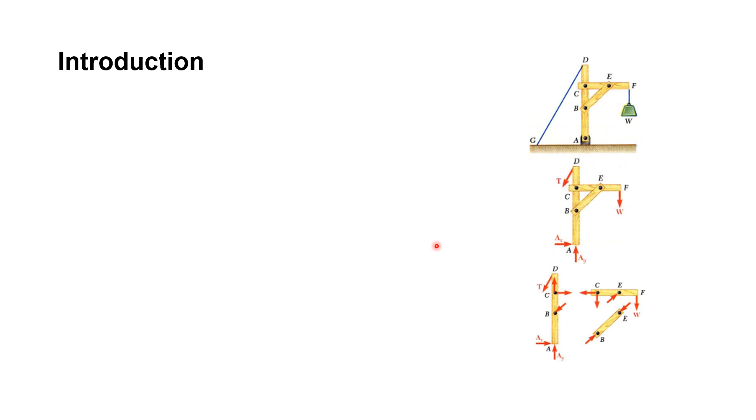Based sa ating reference book, sabi dito, for the equilibrium of structures made of several connected parts, the internal forces as well as the external forces are considered. In the interaction between connected parts, Newton's third law states that the forces of action and reaction between the bodies in contact have the same magnitude, same line of action, and opposite sense.

Halimbawa ito, yung member natin dito. Kung makikita nyo, ito yung point B natin, meron tayong force dito na papunta or moving towards our point B. Pero kapag kinonsider na natin yung member naman natin na BE, makikita nyo, ang naging direction natin is opposite na doon sa nararamdaman ni member DA. Kaya makikita nyo, compressive na yung force natin dito.

Pagdating din sa analysis of structures, kino-consider na natin kung compressive or tensile yung force na nararamdaman ng object natin. Paano ba natin masasabing kapag compressive? Kapag compressive, yung force natin is moving papunta doon sa point of interest natin. At kapag tensile naman, is moving away doon sa point of interest natin.

Mamaya mas maintindihan natin siya pagdating natin doon sa mga other slides natin dito sa presentation.

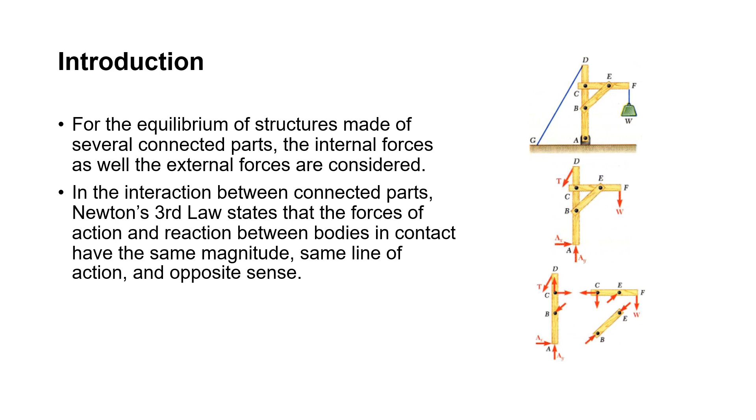Meron po tayong tatlong categories ng engineering structures na i-consider. Una is yung frame, it has at least one multiple force member. Pag trusses naman, from two force member. At lastly is yung machine, structures containing moving parts designed to transmit and modify forces.

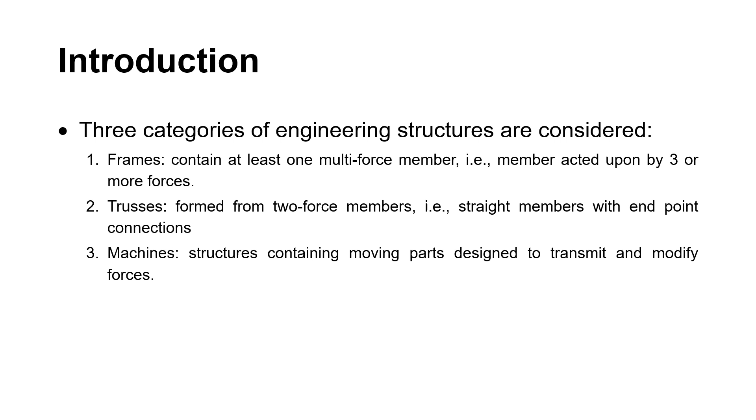Pag-usapan natin si truss muna, kasi ang pag-usapan natin for today is si truss and si frames. Mag-start muna tayo kay truss, define muna natin kung ano si truss.

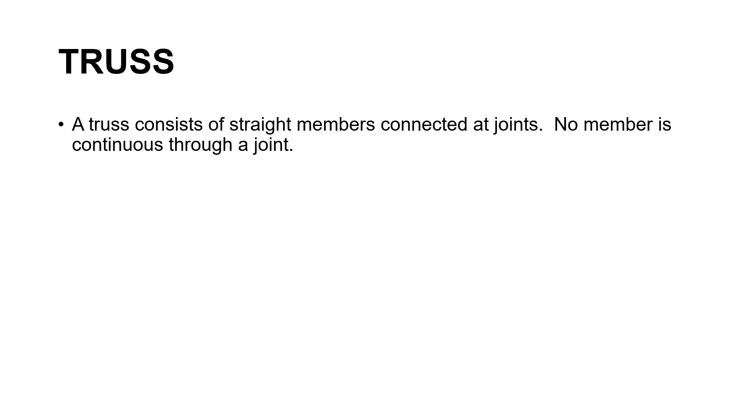A truss consists of straight members connected at joints. No member is continuous through a joint. Bolted or welded connections are assumed to be pinned together. Forces acting at the member ends reduced to a single force and no couple.

Pinaka-common example ng truss natin dito na nakikita natin is dun po sa mga bubong ng bahay natin. Yung pinagkakapitan ng yero, yun po is yung tinatawag natin na trusses. Normally, dati, ang truss ginagamit dyan is wood, yung material natin, pero ngayon nag-move na tayo into metals.

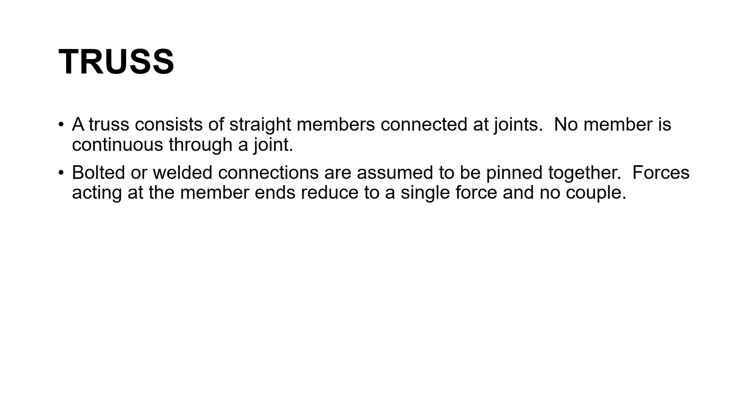Kasi alam naman natin na ang woods is susceptible sa pagkabasa, pagkabulok, then inaanay. Unlike dun sa metals natin, na although may chance sa kalawangin or mag-corrode siya, ang nangyayari lang is nalalagyan naman siya ng protective coating. Pagdating naman sa aircraft, yung mga lumang design ng aircraft natin, tinatawag din natin siyang truss type. Yun naman yung application nito sa atin sa aviation.

Ito po sabi ko kanina, kapag yung forces natin, ang tendency is hinahatak yung member natin palayo doon sa point of interest, yun ay tension. At kapag yung force naman natin, ang tendency is to compress the member, yun naman ang compression.

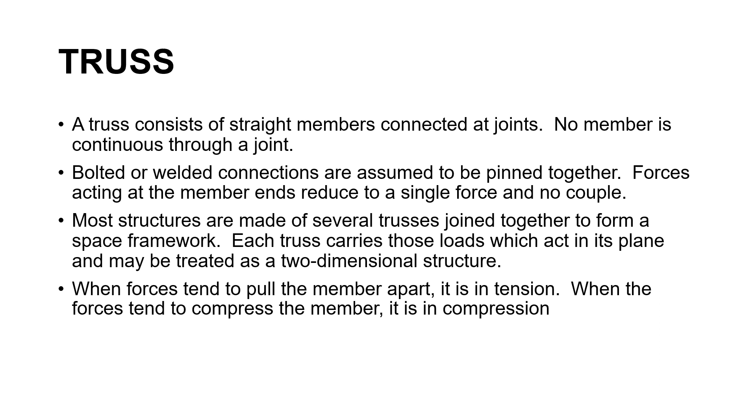Ito po yung mga ilan sa example ng truss type natin. Meron tayong Pratt, meron tayong Howe, Fink, meron tayong Baltimore, K-Truss, Stadium, Cantilever portion, and Bascule.

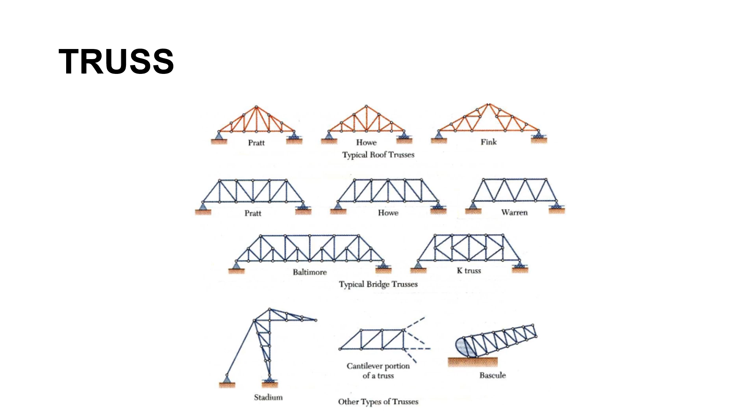Dito, kapag dating sa truss type natin, pag-usapan natin, di ba na matatandaan ninyo doon sa previous topic natin, kinuha lang natin yung resultant, yung reaction, and then tapos na. Ngayon, sa portion natin ngayon, sa topic natin ngayon, iintindihin natin o iisipin natin lahat ng force dito sa bawat member na meron tayo.

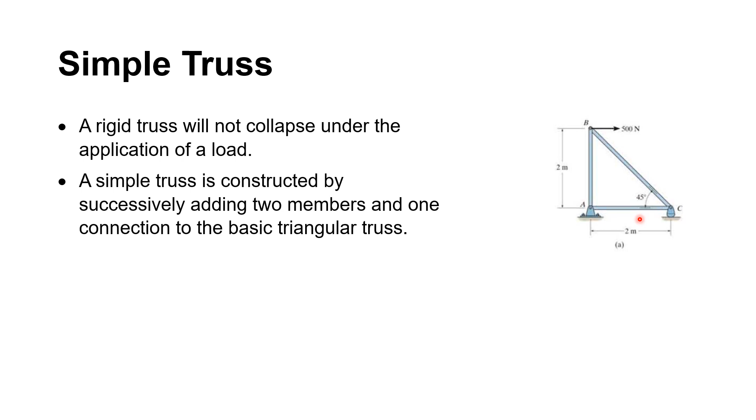Yung member na tinatawag natin dito, halimbawa ito, meron tayong 3 members dito. Ano yun? We have member AB, member AC, and member BC. In a simple truss, M is equals to 2J minus R, where M is the total number of members, J is the number of joints, and R is the number of reactions.

So dito, itong M is equals to 2J minus R, mahalaga na lagi natin itong isipin. Bakit? Kasi yung method na ipapakita ko ngayon ay applicable only for statically determinate trusses. Kapag statically indeterminate na yung truss natin, ibang method na yung gagamitin natin.

Paano natin ma-check kung statically determinate siya? I-apply lang natin itong M is equals to 2J minus R. Kapag nag-equal yung value natin ng M is equals to 2J minus R, ibig sabihin statically determinate.

Kapag sinabi naman natin joints, yun po kung saan yung point na nag-intersect yung mga member natin. So for example dito, ilang joints po ang meron tayo? We have joint A, joint B, and joint C. So meron tayong tatlong joints, at ilan yung reaction forces na meron tayo?

Kung meron tayong roller, isa yung reaction. Meron tayong pin, so dalawa yung reaction, so tatlo. Kapag in-apply natin yung formula, M is equals to 2J minus R, ilang members meron tayo? Di ba meron tayong tatlo, AB, BC, and AC.

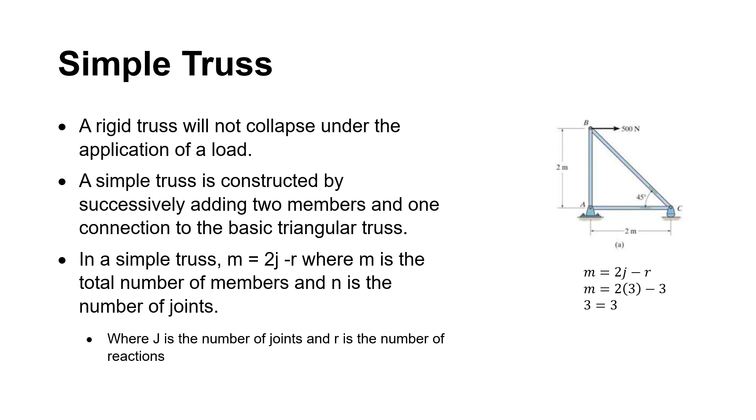So for method of joints, meron tayong dalawang i-introduce dito for analysis of structure: method of joints and method of section. Regardless, may kanya-kanyang pros and cons naman yung bawat method natin.

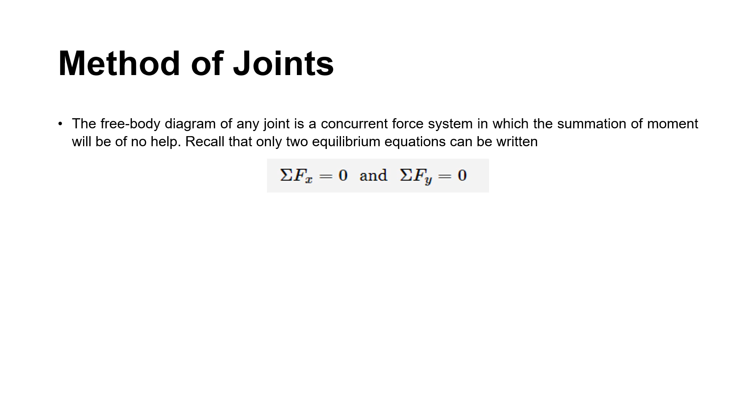Ang pros ng method of joints is kapag pinapahanap sa atin yung lahat ng internal forces nung bawat member ng truss natin, kasi dito, lahat madadaanan po natin. Mga principle lang naman na gagamitin natin dito is yung summation of forces lang natin - summation of forces X, summation of forces Y, yun po yung mga equilibrium equation natin.

Kailangan din po natin dito yung free body diagram natin. Kasi nga, for example, mali yung negative yung force na nakuha natin, ang ibig sabihin lang nun is mali yung assumption natin ng direction ng ating forces. At kailangan nating i-indicate if yung forces natin is under tensile or compressive force siya.

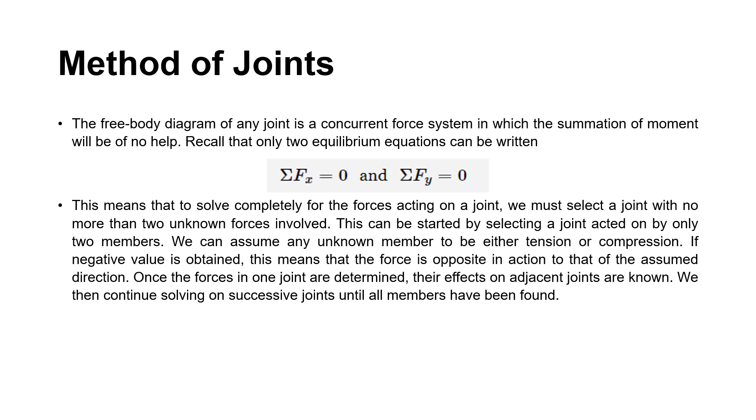Ano po ba yung procedure natin for analyzing a truss using method of joints? Una, free body diagram. Identify po natin kung ano yung mga reactions na meron doon sa forces natin. Then, mag-orient tayo ng X and Y axis natin and be sure lang na tama yung pag-orient po natin.

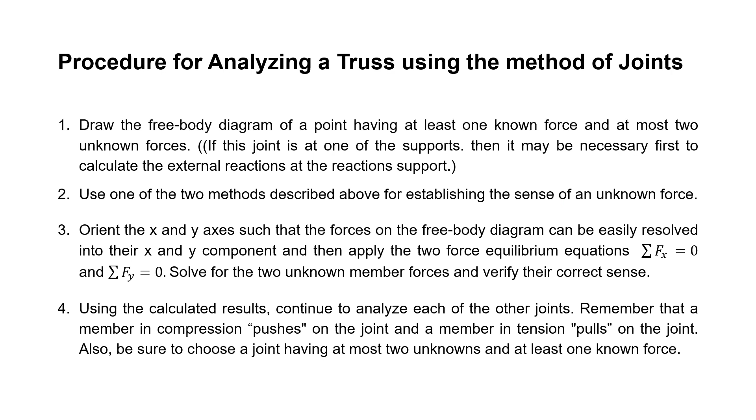Then using yung mga results natin, we can analyze na yung mga joints natin. Remember na kapag in compression, yung mga force po natin is moving towards our joints, at kapag in tension naman, is moving away sa our joints.

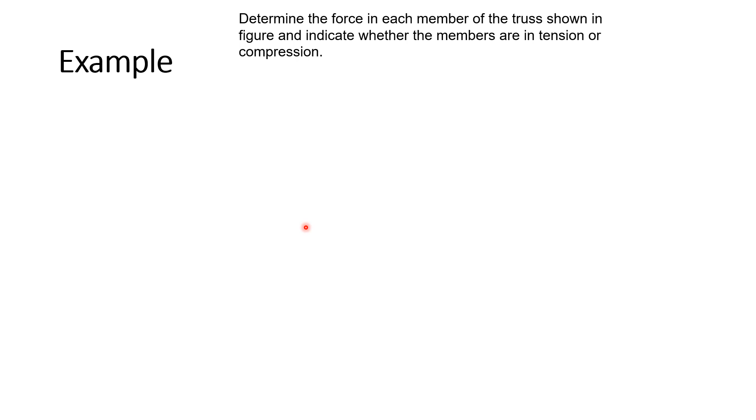Para po mas maintindihan natin yung concept ni method of joints, apply po natin sa example. Determine the force in each member of the truss shown in the figure and indicate whether members are in tension or compression. Ngayon, pipili tayo, pwede natin kunin muna yung reaction forces.

Pero I think, since kulang yung given natin, pwede naman tayo mag-involve muna or gumamit na ibang step. For example, pwede tayo magsimula agad doon sa joint B natin. So, drawing natin yung free body ni joint B, then ito po yung magiging free body diagram natin.

Paano po, sir, paano naging 45 degrees yun dito, yung angle natin dito? Alam natin, di ba, na ang triangle natin ay 180 degrees. So alam natin kung ito ay 45 degrees, ito ay 90, ilan ang kulang para maging 180 degrees? Meron pa tayong 45 degrees natin.

Ito po, ito yung sinasabi ko sa inyo noong previous topics natin, paano tayo mag-a-assume ng direction. For example, ito yung 500 natin, meron tayong 500 newtons na going right. So to counteract that, yung force natin, para masabi natin equilibrium, dapat meron tayong force na nagtutulak papunta sa left side. Kaya si FBC natin is going to the left. And then FBA natin, kung meron tayong force na going up, so dapat may force tayo na going down.

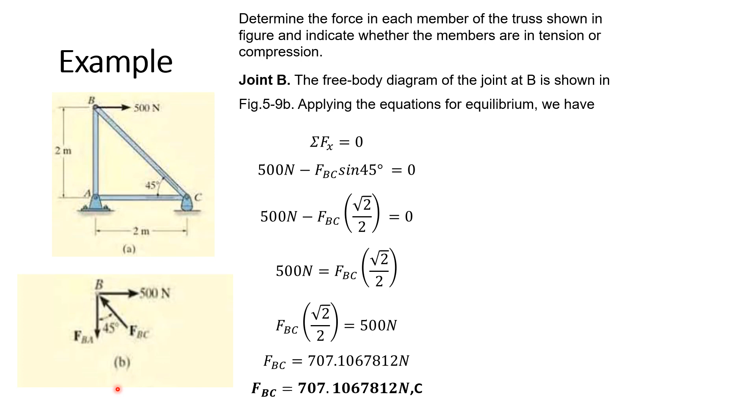Paki-store po yung value na yan, para gagamitin natin siya sa susunod na pag-solve natin. Then indicate natin kung tension or compression. Makikita nyo po, yung FBC natin, ang direction ng arrow natin is papunta doon sa joint natin. Therefore ito ay in compression.

Then next is summation of forces along y naman tayo. Ang may y component lang dyan is si FBC and si FAB. So kung ang ginamit natin sa x component is sine function, ang gagamitin naman natin ay cosine function, kasi alam naman natin nagpapalit lang yung dalawa na yan. So we have FBC cosine 45 minus FBA.

So we have 707.1067812 times square root of 2 over 2 minus FBA. Lipat natin, kapag sinimplify natin to o sinolve natin, we have 500 Newton minus FBA is equal to 0. Therefore FBA natin is 500 Newton.

Then again, kailangan nating indicate kung tension or compression. Ano ba ang direction ni FBA? Moving away doon sa joint natin. So therefore FBA is in tension.

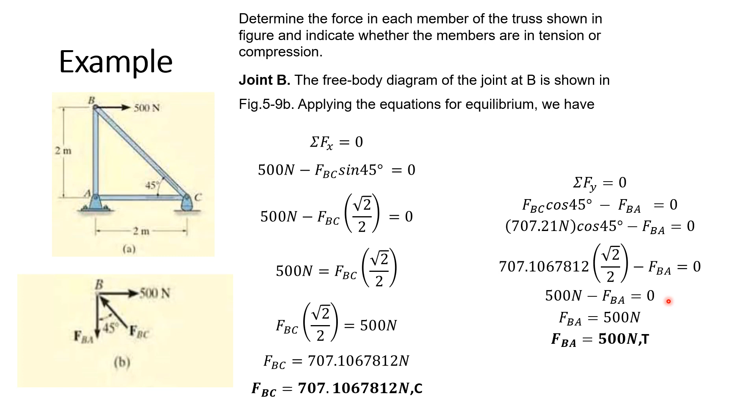Tapos na po tayo doon sa joint B. Proceed naman tayo sa ibang joint. Ngayon doon tayo kay joint C. So drawing natin si joint C natin. So we have...

707.1, ito po dito sa diagram natin naka-rounded off siya, pero ito ay naka-stored value. Sabi po kanina, kapag i-drawing natin siya dun sa ibang member naman, kung in tension o in compression, yung force natin kanina, dapat ang direction niya dito pagdating sa ano natin is in compression pa din siya. So paano siya magiging in compression? Dapat moving towards the joint siya. Kaya makikita nyo dito, si FBC natin is papunta kay joint C.

Then kapag dating sa free body diagram, sabi nga natin kung ito ay going down, dapat meron tayong force na magre-react sa kanya o sa opposite direction. Kung going down, therefore ito yung sa reaction natin kay member C o kay support C is going up. And then ito ay going down na going right. So to resist, si FCA naman dapat is going to the left side or to the negative x direction.

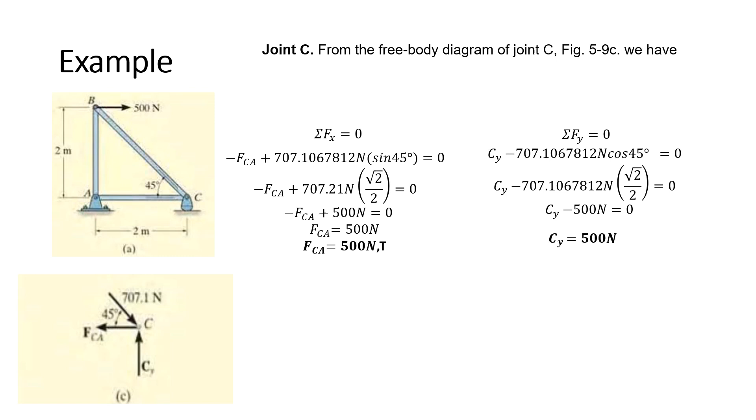The next step is summation of forces along y is equal to 0. Kung sine 45 ulit yung ginamit natin kanina, so therefore ang naman natin dito is cosine 45. So Cy minus 707 cosine 45, Cy minus 707 times square root of 2 over 2. Cy minus 500 Newton is equal to 0. Cy is equal to 500 Newton.

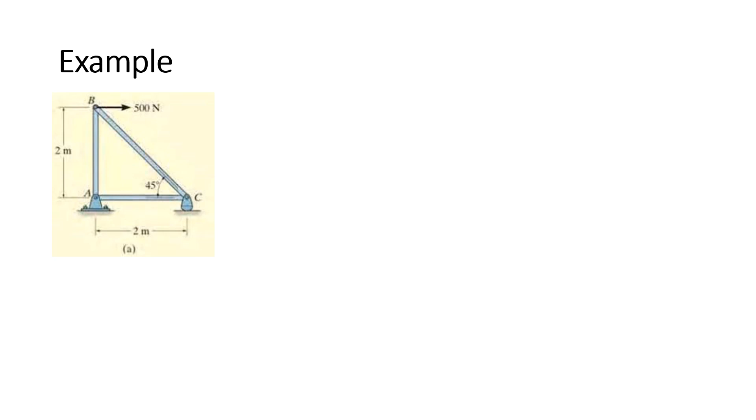Then next, si Cy, alam natin na siya ay yung ating reaction forces. Kaya hindi natin siya kailangan i-indicate kung tensile or compressive siya. Pero kung i-indicate mo, since moving towards doon sa joint natin, siya po ay compressive. Pero since reaction forces siya, we leave it as is, wala pong tensile or compressive.

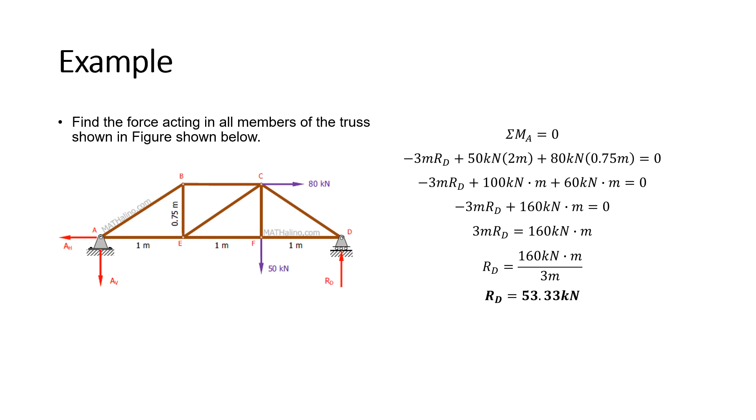Paki-store po yung value natin dyan. Then proceed tayo ngayon sa bawat force member natin.

So at joint A, ito yung magiging free body diagram natin. Ang given sa atin dito ay yung slope ng line natin. Pwede naman tayo, kung hindi angle yung given, we can use the slope of our line. So ito yung free body diagram ni joint A.

Ngayon, kung meron tayong negative force na going to the left, which is yung AH natin, dapat meron tayong force na nagka-counteract sa kanya na going to the right, yun si FAE. Then FAB natin, kailangan i-counteract niya yung force down natin, so dapat siya ay going up. Ngayon, na-drawing natin yung free body diagram.

Pwede na tayo ulit mag-summation of forces. Summation of forces vertical equals to 0. Ang may vertical component lang dito is si FAB at vertical reaction natin kay A. Ano ba yung sine function natin dyan?

Opposite over hypotenuse. Ano ba yung opposite dito? Opposite side natin is 3, hypotenuse natin is 5. So 3 over 5 FAB is equal to 3.33 kN, yung vertical reaction natin dito.

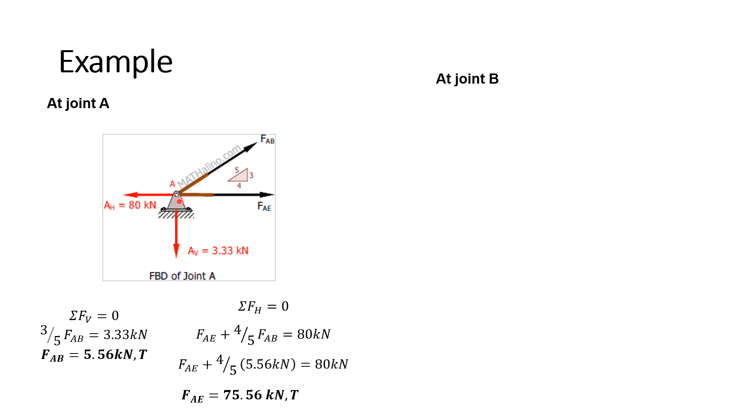Then proceed tayo kay joint B. Dito alam natin, nandito si joint B. Ano mapapansin nyo pagdating sa free body diagram natin? Kung kanina, in tension siya dito, dapat pagdating dito, tension pa rin siya. Kung dito, moving away siya kay joint A, dito, moving away siya kay joint B.

Then kapag meron tayong force na going down and going to the left, dapat may force tayo na going right and going up. Ito po yun, kaya yung pag-assume natin dito, FBC is going to right and FBE is going up. Ano yung next step na gagawin natin? Again, paulit-ulit lang tayo dito, equation of equilibrium.

Summation of forces horizontal is equal to 0. Ang may horizontal component lang dyan is si FAB and FBC. So ano po natin, no? FBC. Negative FAB plus FBC is equal to 0.

Yung x-component ng FBC natin, ng FAB natin. Kaya lang ang hinahanap natin is si FBC, so ilipat lang natin sa kabilang side si FAB. Kaya po nangyari dito is naging positive na si FAB natin. So FBC is equal to 4 over 5 FAB.

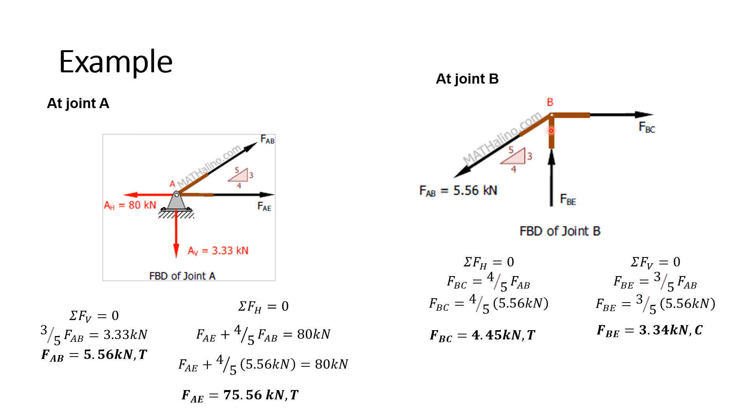So FBE is equal to 3 over 5 times 5.56 kilonewton, FBE is equal to 3.34 kilonewton. Paano siya naging compression? Compression siya kasi ito ay papunta doon sa joint B natin.

Next is proceed tayo kay joint E. Dating kay joint E, ito naman yung magiging free body diagram natin.

Ito ay FBE, so FBE is equal to 3.34 kilonewton. FAE, ito ay opposite direction lang noon sa kanina, yung force natin going right. So kung in tension siya, dapat in tension pa din siya dito. Ito is kung in compression, so dapat yung FBE natin is in compression pa din. Kaya ito ay papunta dito sa baba. Ngayon kung meron tayong force na going to the right o going to the left, dapat may counteraction ang isang member natin. Kaya nagkaroon tayo dito, ang assumption natin ay going to the right. At dito naman kung merong going down, dapat meron tayong going up, which is si FCE.

Ulit lang po tayo, repetitive step na lang tayo dito: summation of forces horizontal and summation of forces vertical. So summation of forces vertical is equal to 0. We have 3 over 5 FCE is equal to FBE. Bakit 3 over 5 FCE natin? Kasi po ito ay yung ating sine component o y component natin. Then 3 over 5 FCE is equal to 3.34 kilonewton. Divide both sides by 3 over 5, wherein kapag nag-divide tayo ng fraction magiging reciprocal ito and magiging multiplication po. Moving away siya doon sa joint natin, so alam natin na ito ay in tension. Solving for FCE, FCE is equal to 5.57 kilonewton in tension.

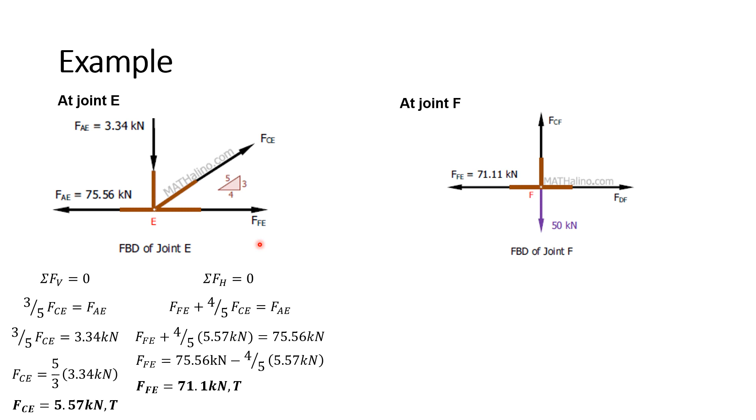Then at joint F, ito yung free body diagram natin. So FFE, kanina alam natin na siya ay in tension, so dapat in tension pa rin siya dito, yung ano natin dito is going to the left. Then si FDF natin, kung going to the left, dapat going to the right. Kung meron tayong force na 50 kilonewtons dito at force F going down, si FCF pwede po natin i-assume na going up. Then summation of forces vertical equals to 0. Wala naman tayong component method dito, bakit? Nasa x and y axis lang mismo yung forces natin. So FCF is equal to 50 kilonewtons. Siya ay in tension gawa ng moving away doon sa joint natin.

Then for FDF, ganoon naman ulit tayo. Summation of forces horizontal equals to 0. So FDF minus FFE is equal to 0. FDF is equal to 71.1 kilonewton in tension. Again, in tension kasi moving away doon sa joint natin.

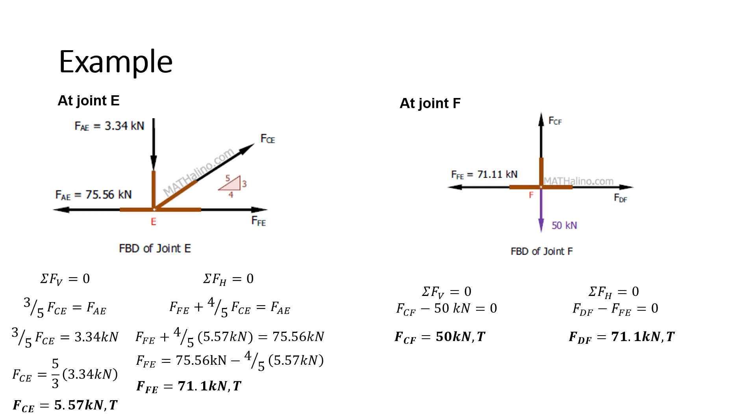Then next step po natin ay summation of forces horizontal is equal to 0. Ano-ano yung may mga horizontal component dyan? Si BC, si CE, tsaka si CD. So substitute lang natin, kung going to the left.

So, alam natin negative 4 over 5 FCD. Kinuha lang po natin yung x component ni FCD, minus 4 over 5 FCE kasi yung x component ni FCE, minus FBC (si FBC is going to the left), plus 80 kN is equals to 0.

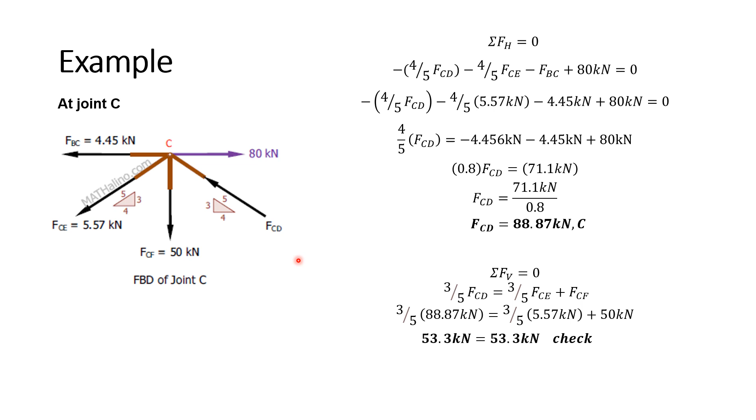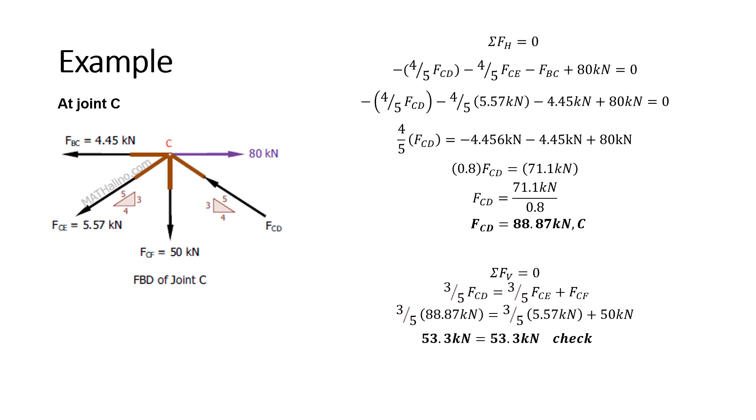Dito po, wala naman na tayo kailangang hanapin kasi nakuha na natin si FCD, kaya lang kailangan nating i-check. Itong checking part naman is hindi siya necessary, pero maganda siyang practice, kasi kapag hindi siya nag-equal dito, therefore may mali tayong mga na-solve na value. Kung makikita nyo po dito, si FCD is nag-equal siya doon sa sum nung CE and CF component natin. Kung nag-equal sila, therefore tama po yung na-solve natin na value. Pero pagdating sa mga assessments, si checking naman po is hindi na siya necessary part ng solution natin, pero wala namang masama kung we can practice na i-verify kung tama yung mga sagot natin.

Then at joint D, si joint D kasi is na-solve na natin siya. Si FCD, na-solve na rin natin, and si FDF. Pero pwede natin siyang i-check kung tama yung nakuha nating value. Checking po is an optional part of your solution.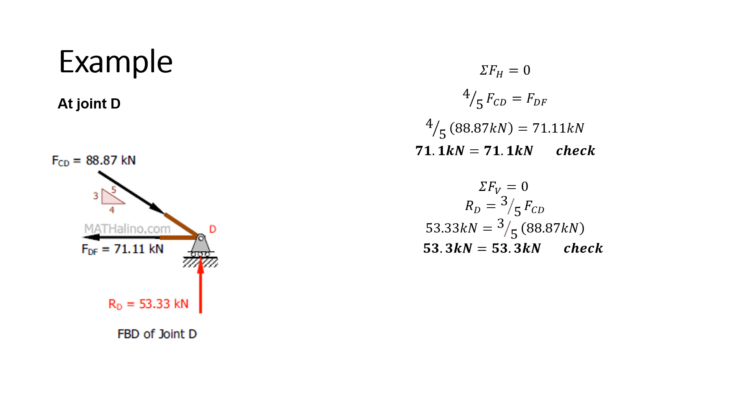Since nag-equal po yung sagot natin, therefore tama yung mga initial value natin. Kasi ang maiwasan naman natin kapag nag-checking tayo, kapag hindi nagtugma yung mga sagot natin, hindi nag-equate sa isa't isa, ibig sabihin meron po tayong mali doon sa solution natin. Ang mangyayari naman doon is pwede natin siyang hanapin para ma-verify natin o ma-check natin kung saan tayong part nagkaroon ng error. Ganun din po kapag nag-summation forces vertical tayo, nag-equate o nag-equal yung sagot natin, therefore tama po yung mga values na na-solve natin.

So, to give the summary, i-drawing lang natin yung free body diagram, then ilagay natin yung mga forces na na-solve natin with their corresponding direction, kung tensile or if compressive.

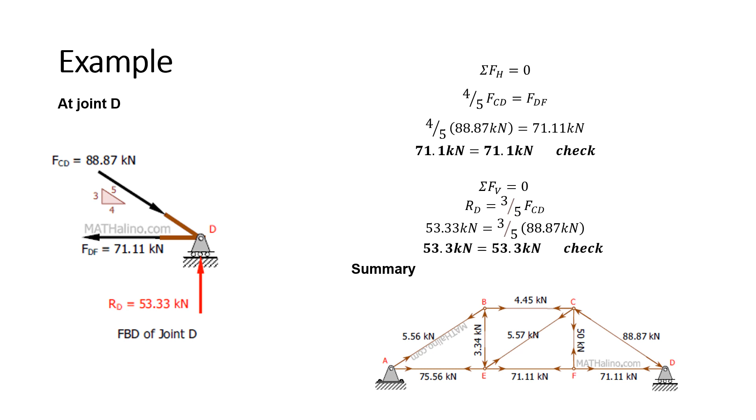Ngayon, introduce ko kayo sa second step, second na type ng solution natin. Ano naman to? Method of sections. Ang magagamit nyo siya, yung pros nga, is pwede nyo siya magamit doon kapag may pinapahanap lang na forces sa specific members, hindi sa lahat ng forces nung lahat ng member ng trusses natin. Pero itong method of section is medyo nakakalito siya as compared doon sa direct type of solution na ginagamit natin kay method of joints, kasi dito mag-apply na rin tayo ng moment, tsaka medyo complicated na yung iba doon sa magiging solution natin. Kasi tayo magde-determine kung saan tayo mag-moment, kung saan tayo magsi-section.

In this method, we will cut the trusses into two sections by passing a cutting plane through the members whose internal force we wish to determine. This method permits us to solve directly any member by analyzing the left or the right section of the cutting plane. Kung sa method of joints ang ginagamit natin ay summation of forces horizontal and summation of forces vertical, dito gagamit na tayo ng pangatlong equation of equilibrium, which is the summation of moment.

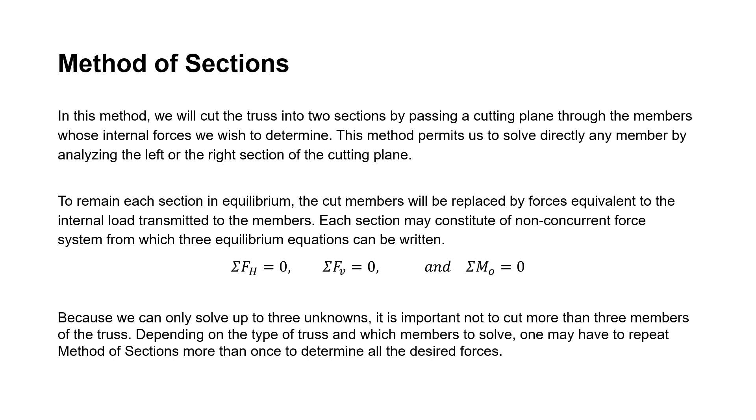Procedure for analyzing a truss using the methods of section. So, no free body diagram, kailangan i-drawing, then kailangan natin mag-decide kung paano natin hahatiin yung trusses natin. So syempre dapat kapag hindi tayo basta-basta magsi-section, kailangan kapag nag-section tayo, nandun yung mga force na pinapahanap sa atin.

Then before isolating the appropriate section, it may first be necessary to determine the truss support reaction. Kailangan pa rin yung reaction forces is ma-solve natin or ma-identify na natin kung ano yung value. Then, draw the free body diagram of that segment of the section truss, which has the least number of force acting on it. Use one of the two methods described above for establishing the sense of unknown member.

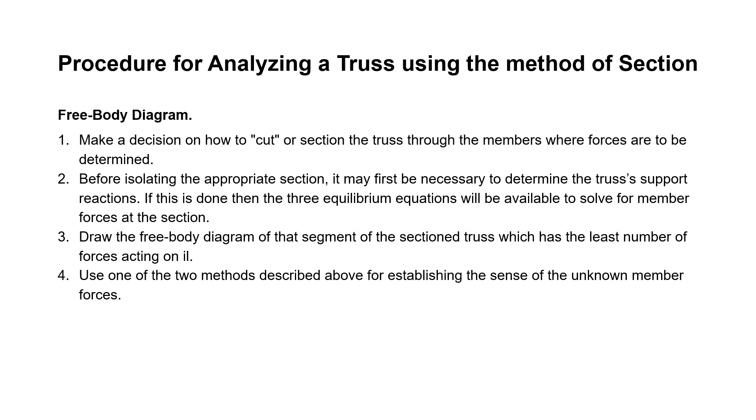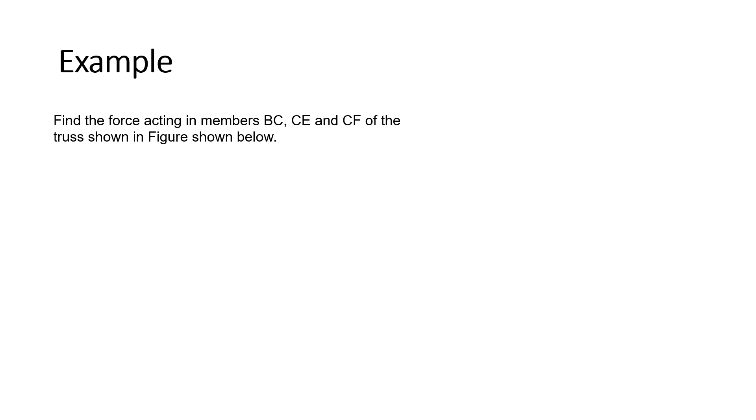Para po mas maintindihan natin si method of sections, apply natin siya dun sa example. Find the force acting in members BC, CE, and CF of the truss shown in the figure below. Ito po, yung truss natin dito is parehas pa rin dun sa truss dun sa previous example natin. Dito papakita lang natin, ang kaibahan lang no, is may specified member lang na pinapahanap, Member BC, CE, and EF.

Again, unang gagawin natin is i-section natin. Nasan ba yung mga pinapahanap? Kailangan kapag nag-section tayo, nandoon syempre yung mga point of interest na pinapahanap sa atin. For example, ito, nag-section tayo at A, between dito no BC. Kapag hinati natin siya, nandito ba yung mga unknowns natin na hinahanap? Yes, nandito siya. We have BC, EC, and EF. Dapat daw na kapag nag-section tayo, hindi lagpas sa 3 yung unknowns na hinahanap natin. Ano lang ba yung mga unknowns doon? Di ba 3 lang sakto, so equal to 3. Ibig sabihin, pwede tayo mag-proceed kay methods of section.

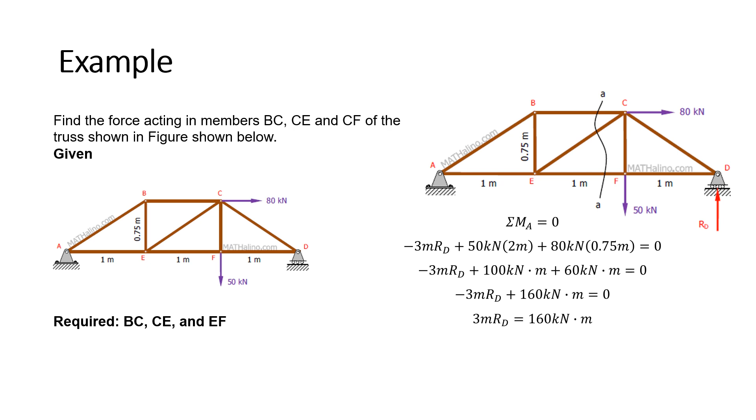Then, syempre, hanapin muna natin yung reaction forces natin. Bakit? Kasi kulang tayo ng force dito, involved sa atin si force D. So, pag nag-section tayo, hanapin muna natin yung reaction. Diba? Kanina, nasolve naman na natin yung reaction, so repeat lang natin yung step. Yung reaction natin dito is 53.33 kilonewton.

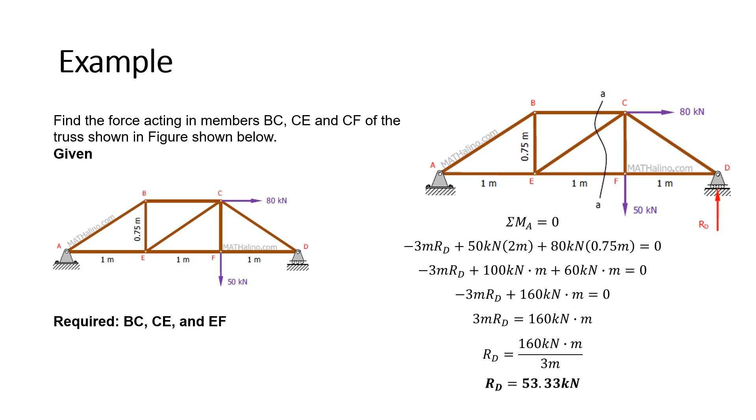Dito, napipili kasi kayo kung saan nyo yung gusto nyong gamitin na section. Dito, ang pinili ko syempre is, ito na, yung right side. Bakit? Kasi may mga given na force tayo dito. Unlike kung dito tayo, kung walang given na force, is mas mahihirapan po tayo.

Then, next is, okay, so ngayon po, na-section na natin siya, hanap na natin yung reaction forces, pwede na tayong mag-moment. Saan po tayo mag-moment? Doon tayo mag-moment kung saan, again, marami tayong force na makakancel. Kapag dito ba ako nag-moment, dito ako nag-moment, sabihin natin, kay point E. Ano yung mga force na maka-cancel sa akin? Ang maka-cancel sa akin dito is ito, yung CE natin, tsaka FE. Then, makukuha ko si BC.

Kaya dito ako mag-moment. So, kapag nag-moment tayo, magiging ganito yung free body diagram natin. Drawing lang natin. Ito yung point E natin. Ganito po kasi yung itsura niyan, technically, nagputol tayo. Then, hindi na natin i-consider yung ibang portion natin. Dito, ito yung isang member na hinahanap sa atin, BC, ito si EF, ito si EC.

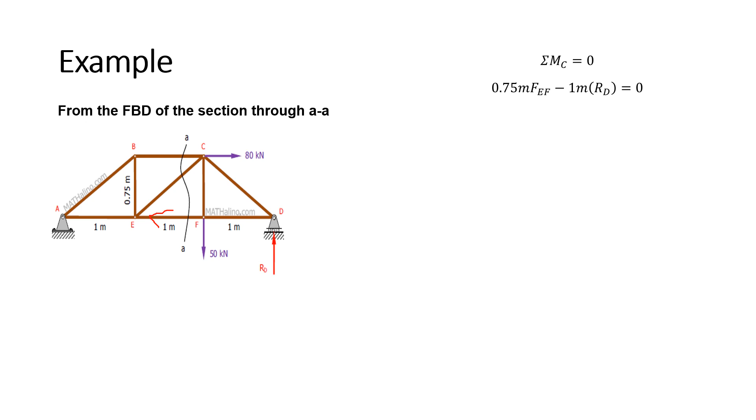So we have, pag nag-moment tayo dito, so again, assumption natin kanina, doon sa direction ni EF is going to the right, going to the left siya. So kapag nag-rotate tayo dito, same rotation, so alam natin na siya ay positive. So negative, perpendicular o moment arm natin, or perpendicular distance is 0.75 times EF minus 1 RD. Kasi bakit negative? Nag-rotate tayo dito, same direction, negative.

Sir, saan napunta si 50 kilonewtons tsaka si 80? Di ba same line of action sila doon sa joint C natin? Dumadaan sila sa joint C, so cancel out po sila. Then transpose natin, sa kabilang side yung RD natin. So 0.75 EF is equals to 53.33 times 1 meter. Divide both sides by 0.75 meter. FEF natin is...

71.11 kilonewton in tension. So kanina hindi ko po pala na-specify doon sa FBD natin. Yung assumption kasi natin kanina ng direction, lahat ay palayo doon sa joint natin. So kung palayo sa joint, kung palayo siya doon sa joint C natin, siya ay in tension. Then ano yung next na hanapin natin?

Pwede tayo ngayon mag-summation of forces vertical kay joint C. Bakit? Kasi ang present na lang na force natin doon is meron tayong FCE natin, meron tayong 50 kN, tsaka yung RD natin. Sir, bakit hindi na natin sinama si CD? Eh di ba meron pa siyang vertical forces dyan?

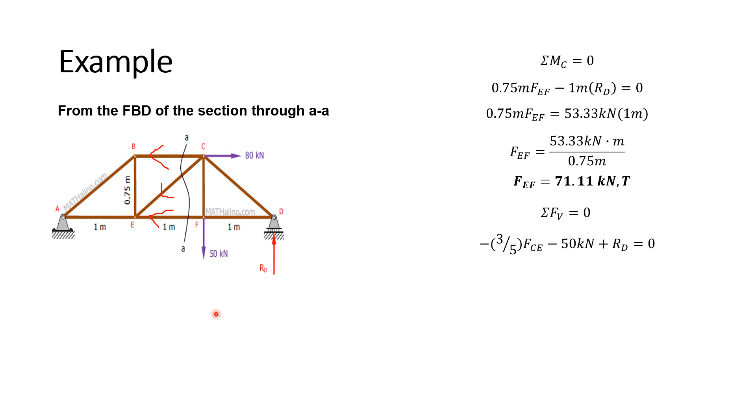So we have... sir, saan nanggaling si 3/5? Doon pa rin siya nanggaling dito sa ratio nung triangle natin dito, yung sa slope natin. Hindi lang siya naka-indicate dito, nalimutan sa presentation, pero doon pa rin po siya nanggaling. So we have negative 3/5 FCE minus 50 plus RD is equal to 0. Negative 3/5 FCE minus 50 kilonewton plus 53.33. So 0.6 FCE is equals to 3.33.

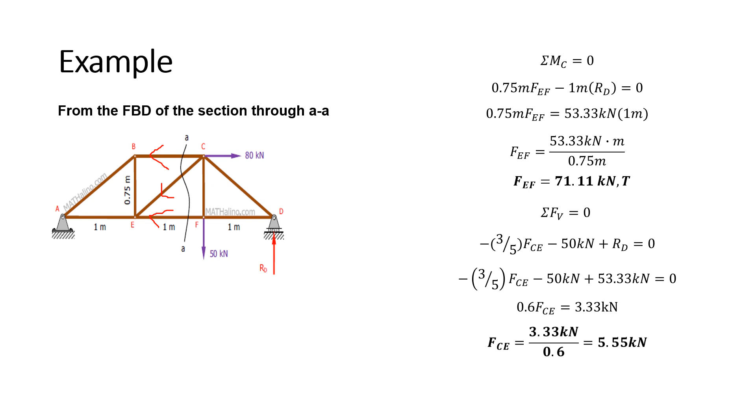Divide both sides by 0.6. So FCE is equal to 5.55 kilonewton. Kaya lang, FCE natin is alam natin na going away doon sa joints natin, so ito ay in tension.

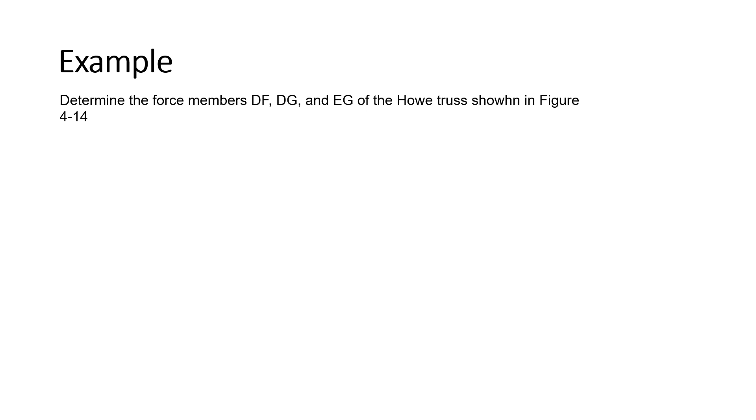Proceed tayo sa another sample problem natin para mas ma-appreciate natin si method of section. So given tayo ng truss dito, pinapahanap sa atin is si member DF, DG, and EG. Wherein dito sa problem natin, si reaction forces ay ibinigay na yung value natin, or yung value ng reaction forces natin, so mapapadali yung pagdating sa solution natin.

So si DF, DG, and EG, hanapin muna natin siya. Saan siya nagfo-fall? Ito po, di ba? Si DF, andito si DG, andito si EG. So pwede akong mag-section dito, pwede akong mag-section dito sa side na to. Regardless, dapat parehas yung value natin kung saan tayo mag-section.

Then ang ginawa po, nag-section tayo dito, then ang kinonsider natin na side is ito, yung right side natin. Dito po tayo nag-section. Then kinonsider natin yung right side. Then nag-assume tayo ng direction ng mga forces natin. So dito, makikita nyo, pinili natin yung section to the right. In-assume na direction ng force natin is going to joint F, moving to joint G, then moving away kay joint G naman yung EG natin.

Given tayo dito ng side natin na 4 meters. So paano naging 4? We have 4 panels at 4 meters: 1, 2, 3, 4. So 16 divided by 4 segments equals to 4 meters, kasi given sa atin, di ba, 16 meters. Kaya yan naging 4. Given tayo dito ng height natin na 3 meters. So doon natin nakuha yung elements nito nung sa slope natin. So kung meron tayong height na 3, meron tayong adjacent side na 4 to solve yung hypotenuse natin, using Pythagorean theorem, we can solve na ito ay 5. So doon po nanggaling yan.

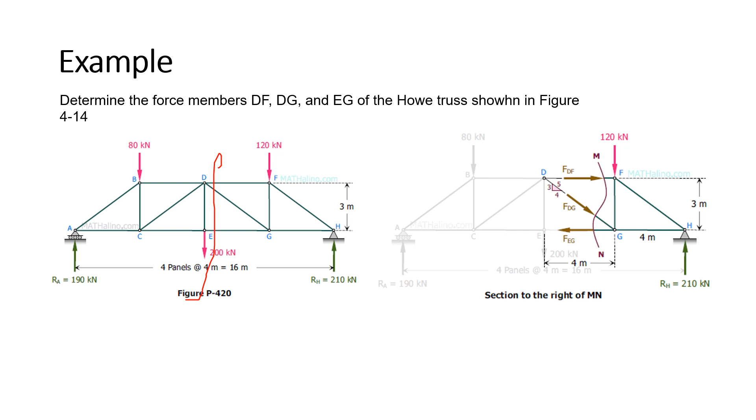Ngayon, pwede natin i-apply yung method of section. So, ito yung free body diagram natin. Summation of forces, vertical muna tayo. Bakit tayo magsa-summation of forces vertical? Kasi doon makukuha natin yung vertical component ni FDG. Kasi ang given lang sa atin dito, horizontal naman si FDF, si FEG, then known value si yung horizontal reaction, vertical reaction natin kay H.

Bakit negative yung FDG? Vertical, negative siya kasi pababa. So, minus 120 plus 210 equals to 0.

Kunin natin yung vertical component. Ano ba ang vertical component natin? Diba, sine function, sine is equals to opposite over hypotenuse. Opposite side natin is 3, hypotenuse is 5, doon nanggaling si 3/5. Then simplify natin ng 120 minus plus 210, we have 90 kilonewton. Then lipat natin.

So, we have negative 3/5 FDG plus 90 is equal to 0. Lipat natin sa kabilang side si FDG. So, we have 3/5 FDG is equal to 90 kilonewton. Divide both sides by 3/5.

Dito, ginawa, pinakita pa yung detailed solution. Multiply muna both sides by 5 to cancel yung denominator natin dito, then mag-divide over 3. So, 3 FDG is equals to 450. FDG is equals to 150 kilonewton.

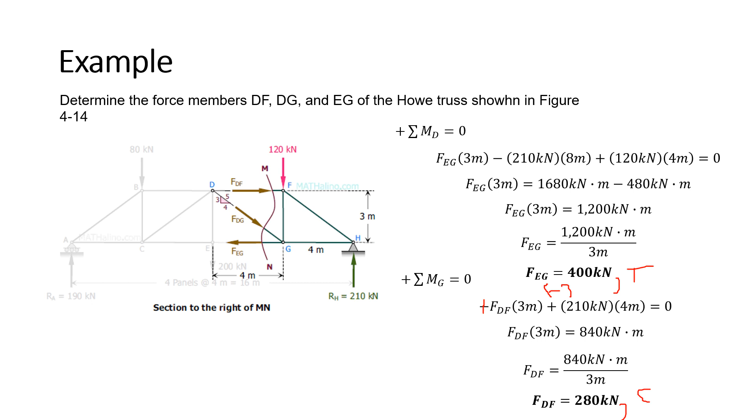Yun po yung ating method of section. Ngayon, pupunta tayo dito sa last natin, which is yung frame analysis or method of members.

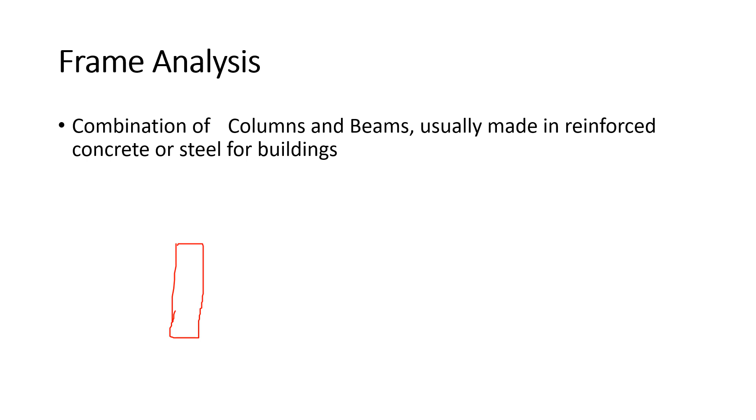Si frames naman po is combination lang siya ng columns and beams natin. Normally, made ng reinforced concrete kapag ang pinag-uusapan natin ay reinforced concrete, or steel kapag ang pinag-uusapan natin dito ay mga buildings. Pag sinabi po natin columns, ito yung ating mga vertical component. Kasi 'di ba ang columns natin ay ayan po, yan yung mga columns, mga nakatayo. And then halimbawa ito yung ground natin, naka-fix sila diyan.

Then yung beams naman natin, yun yung... I mean yung beam natin ay yung ating mga horizontal components.

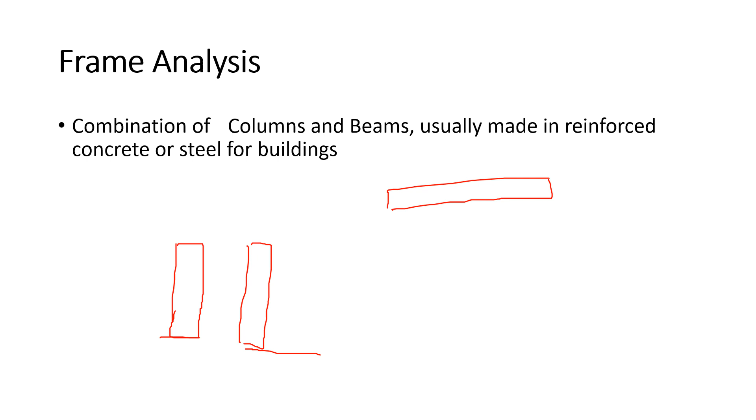Pagdating sa method of members, ang mangyayari dito ay ihiwalay natin yung three-force member, in general or non-axial member na hindi simpleng tension or compression. Dito, frames are pin-connected structures kung saan ang ilan o lahat ng members ay three-force members. To analyze a frame, we can disconnect the three-force member from the structure and draw the FBD of the member. This approach is called the method of members.

Ang ginagawa natin dito ay paghihiwa-hiwalayin natin yung bawat member ng mga frames na meron tayo. Mamaya, para mas maintindihan, i-apply natin sa example. Dito, ang ginagamit nating equation of equilibrium ay tatlo: summation of forces horizontal, summation of forces vertical, at summation of moment natin. Lahat po yun ay equal to 0.

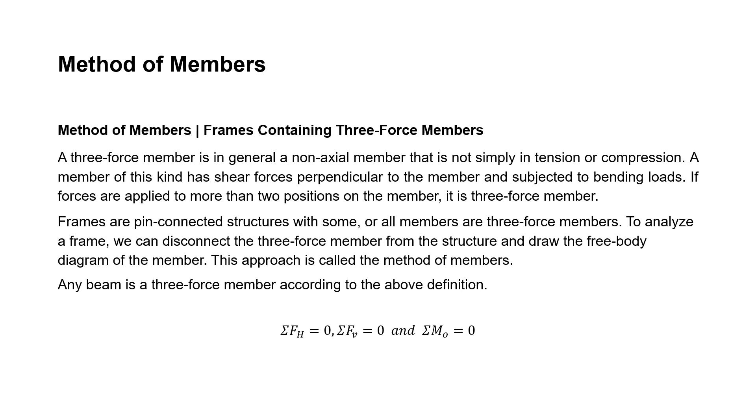Halimbawa, ito yung mga members natin. Kapag 2 points or axial member lang, pwede nating sabihin na yung force natin ay pwede nating i-resolve, yung reaction ng forces natin into 1. Pero kapag non-axial member naman siya, ang mangyayari ay i-resolve natin into components yung mga forces na meron tayo. We have horizontal and vertical components.

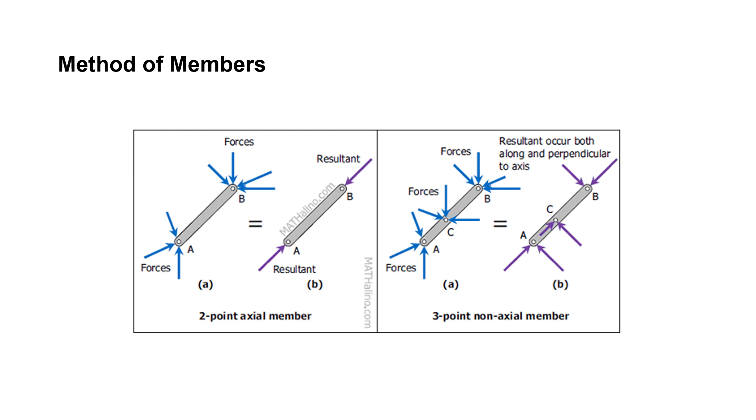Halimbawa, ito yung mga tinatawag nating frames. Kung matatandaan niyo, ito yung kanina doon sa previous slide natin. Dito, kung makikita niyo, pwede natin siyang himayan into ilang members. Tatlo: we have member DA, member BE, and member CF.

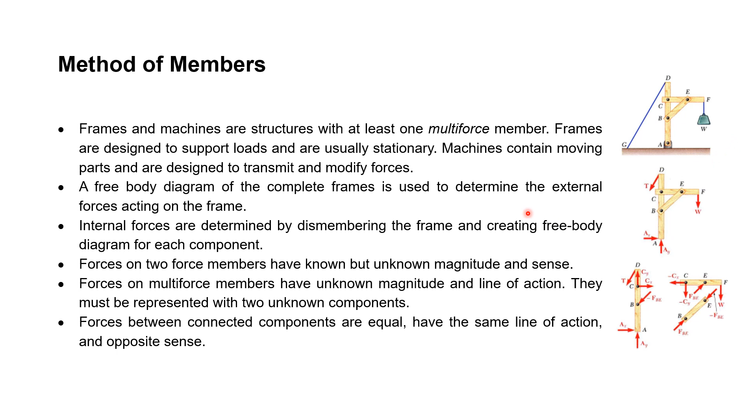Para mas maintindihan, i-apply natin sa example. So given tayo dito ngayon ng frame natin. Ilang members meron yung frame natin? Yung frame natin ay merong tatlong members: member AE, member AF, and member BD.

Kaya lang, meron tayong pin dito kay A, may pin tayo kay B, meron tayong pin kay C, meron tayo ditong pin kay E, meron tayo dito kay F na nandun naman sa yun yung mga supports natin. We have a pin support and roller support.

So first, i-solve muna natin yung reaction forces natin. Kung alam natin ito ay pin member or pin support, we have two reactions. Kapag roller naman, alam natin na isa lang. So again, we can simply assume the direction of the reactions. Kapag negative lang yung sign na lumabas, ang ibig sabihin lang ay mali yung assumption natin, at pwede nating i-fix yun.

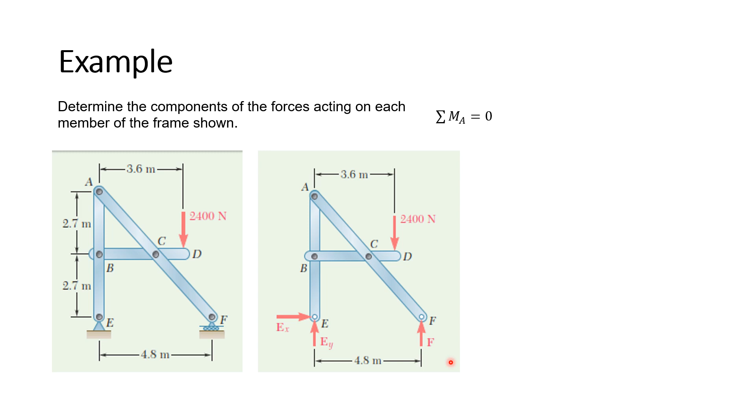Hindi po tayo dito pwede mag-summation of forces lang basta-basta. Bakit? Kasi wala tayong masasolve dyan, dahil hindi natin maka-cancel out yung EY natin and yung force F natin. So kapag nag-moment tayo kay A, may mga maka-cancel tayong forces. Ano yon? Maka-cancel si E. Then masasolve natin yung reaction F natin.

Pwede rin naman na ikaw yung mag-moment, wala rin naman problema doon. So 2,400 times yung moment arm natin na 3.6 meters minus F. Bakit minus yan? Kasi clockwise positive ang moment natin, opposite direction, times the moment arm of 4.8 meters. So 8,640 minus 4.8F is equals to 0. Divide both sides by 4.8. Yung reaction force natin na F is equals to 1,800 newtons.

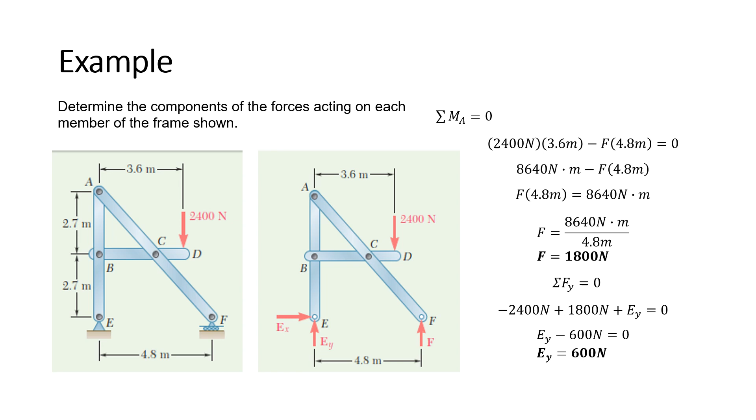Then summation of force along Y. Pwede tayo mag-summation of forces. Summation of force along Y is equals to 0. Negative 2,400 kasi going down, plus 1,800 plus EY equals to 0. EY minus 600 is equals to 0. EY is equals to 600 Newton. Then EX is equals to 0. Bakit EX equals to 0? Kasi wala naman tayong ibang force na nag-a-act doon sa x-axis.

So kapag nag-moment tayo kay B, ano mangyayari? Cancel, kapag kinonsider natin si member BCD, pag nag-moment tayo kay B, cancel si CX, cancel si BX, cancel si BY. Matitira sa atin ay si CY. So masasolve natin siya.

So we have clockwise positive moment tayo. 2,400 times 3.6 minus CY times 2.4. Yung mga lengths naman natin ay given na doon sa diagram natin. So 8,640 minus 2.4CY is equals to 0. Divide both sides by 2.4. CY natin is equal to 3,600 Newton.

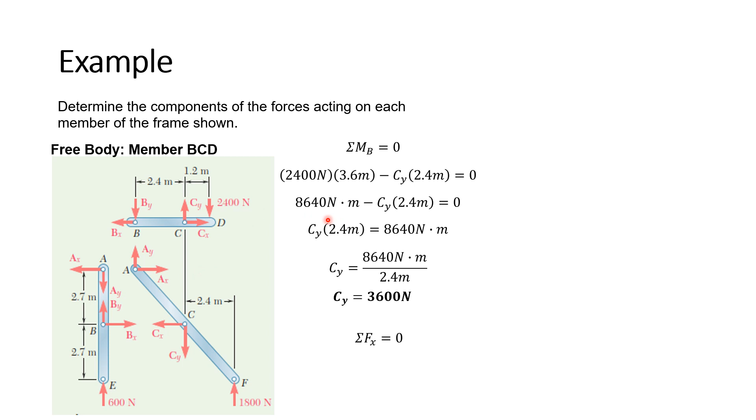Next is summation of forces along X. What forces do we have along X? We have BX and CX. Can we solve it? We cannot solve it yet, because the values are still unknown to us. So, negative BX plus CX equals 0. We can only say that BX is equal to CX. Later, once we finish analyzing our frames, it will have a value.

Next, let's take moment at C. When we take moment at C, what cancels out? CX cancels, CY cancels, BX cancels. What remains is BY. So let's take moment here, clockwise positive. Our BY is negative, because it's opposite direction. Then the 2400 is positive since it's in the same direction.

So we have 2400 times 1.2 minus BY times 2.4. So 2880 minus 2.4 BY equals 0. Transpose to the other side, then divide both sides by 2.4. BY equals 1,200 Newton. We already got BY.

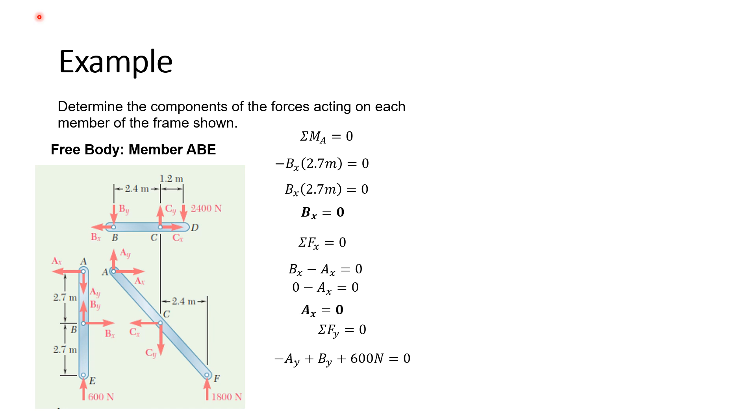Then, summation of force along Y. Negative AY plus BY plus 600 equals 0. Take note, BY we already solved earlier, so we can substitute it here. So negative AY plus 1,200 plus 600 equals 0. AY equals 1,800 Newton.